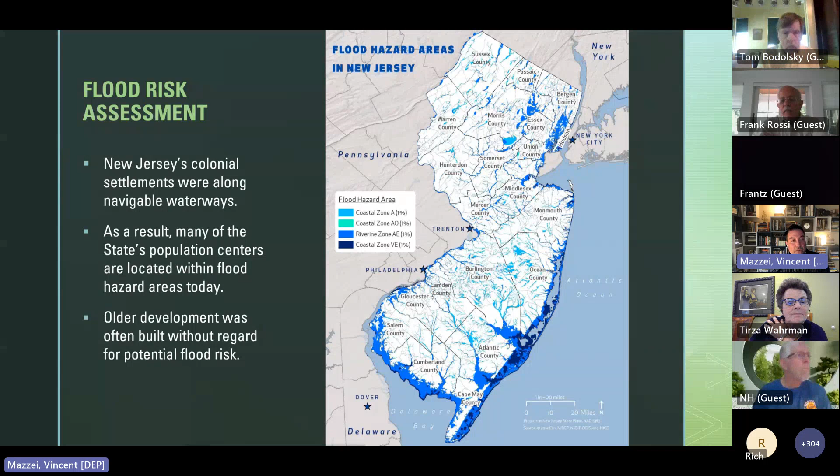And it's all about that assessment of flood risk. If you were buying a piece of property, looking for a place to live, or thinking of renting a building for a business, you might pick up a FEMA flood map and assume that it's a good approximation or indicator of your flood risk on the site.

The problem is that the flood risk shown on those maps is measured by what's happened in the past. It's a projection of the future based on the past. And if there's one thing we know about climate change, it's that the progression of these things is no longer linear. Stationarity is dead.

So we can't use flood maps based on data collected 50 years ago or more, shown on FEMA flood insurance rate maps, which were produced by FEMA to let insurers know, and themselves know, how much insurance to charge someone.

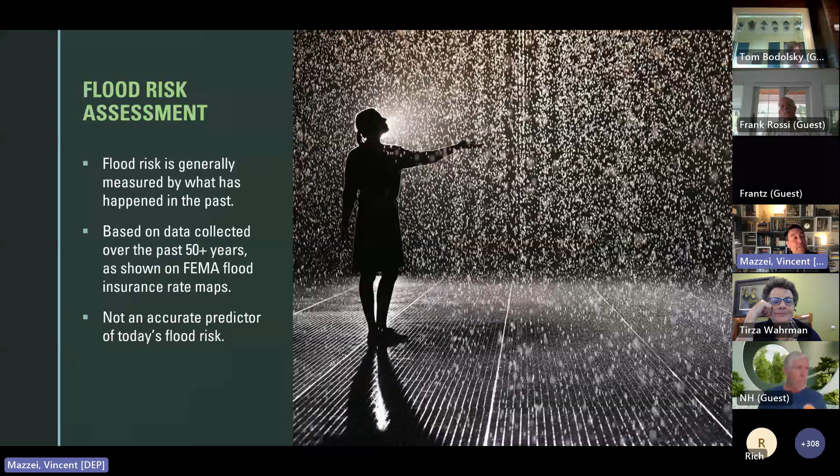So it's basically a flood insurance tool. And we realize that not only does it not accurately show what your flood risk is today, but it's definitely not a predictor of tomorrow's flood risk, because it doesn't include any climate change data in it.

So here we are, faced with these flood maps that we use, and they're useful, but how do we adapt them to a changing climate?

The basis of this, of course, is that people need to be aware of the flood risks when they're buying, renting, or developing property.

And although mapping is a good place to start, we've seen over and over again that flooding goes past that line on the map, because the flood doesn't know it's supposed to stop at that line on the map.

I'm going to show you some aerials, some examples where just recently the flooding has gone significantly past the line on the map, and the people outside that line are often not protected.

They don't know that they should get flood insurance. They don't know that they're at a flood risk.

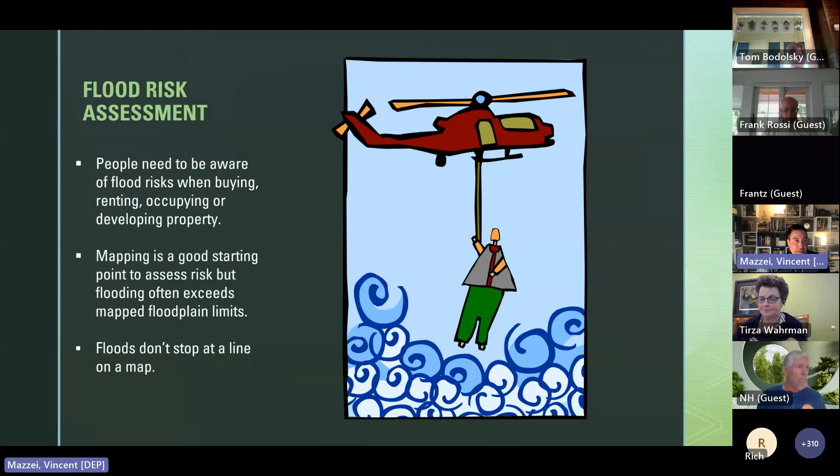So here's a snapshot of New Jersey, just to set the table. 9.2 million people, the most densely populated state in the nation. About 16% of the state lies within a flood hazard area.

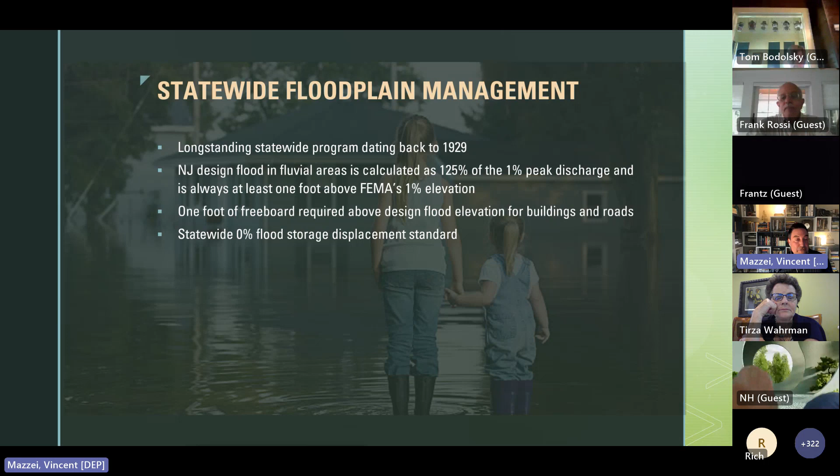We have 0% net fill across the whole state. I was at a conference recently in Raleigh, the Association of State Floodplain Managers, and we gave a presentation about what New Jersey was doing, and no other state is doing anything like this. When I was explaining the concept of flood storage displacement, that when you put some building or fill in a floodplain, the water that would be going there has to go someplace else, so we have to balance that. Folks in other states were astonished that we've done that. We've done that for years.

We have to have dry access for critical buildings and multi-residence buildings. So if you're putting in a new hospital or an apartment building, you have to have roads that can get to and from the building so that emergency vehicles can get there and people can evacuate. We've got progressive statewide stormwater management policies on the forefront of the state, and stream corridor protection standards through our riparian zones.

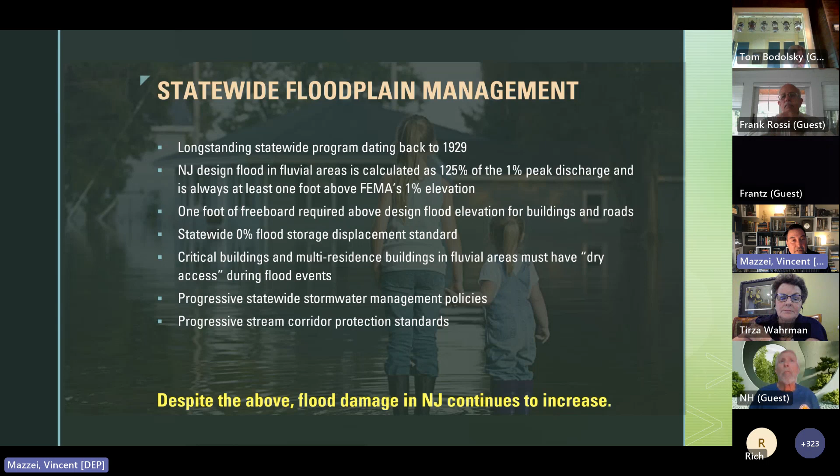But despite everything that we've done so far, flood damage continues to increase every year. And so we felt that it was incumbent on us to take action.

So if you put it all together, you've got the most densely populated state. You've got chronic flooding issues going back hundreds of years. About 16% of the state lies in a flood hazard area, and more than 16% of the population is in that flood hazard area. We have enormous development pressure. Development itself can increase flooding if it's not regulated. And then you add on top of that climate change. So that's unsustainable unless we take action.

And that's what this rulemaking is about. So going back to 2020, Governor Murphy had signed Executive Order 100 and Administrative Order 2020-01 by then Commissioner McCabe, directing DEP to integrate climate change considerations such as sea level rise, chronic flooding, precipitation into its regulatory and permitting programs. So this is a piece of that.

It's an effort to take the data and the science that we have, and what we know has happened and will continue to happen, and put it into our stormwater rules and our flood hazard rules so that people are safer, and ultimately that things designed today are not just safe for today, but safe for the lifetime of the structure. That's the goal.

So just a little background: higher temperatures in the atmosphere have been occurring, and that increases the energy in the atmosphere, which increases the potential for more intense storm events. Some studies show that by the end of the 21st century, heavy storm events are projected to occur 2 to 5 times more often and with more intensity than in the previous century. I don't have to remind everyone of the major floods that have hit just in this century so far. And that doesn't include the flash floods that seem to be happening every time we turn around. It seems like there's another report of a flash flood happening somewhere.

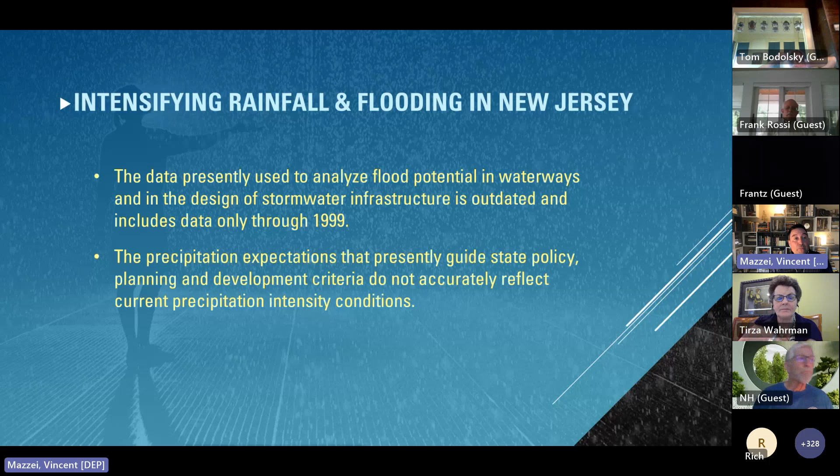And that's not surprising, right? Because intensifying rainfall means intensifying flooding. Storm sewer systems can only handle so much water. And the data that things are designed on, even today, is based on data from the National Weather Service that was only updated through 1999. So when someone is designing something even for today's conditions, it's not even today's conditions, right? It was based on the 1999 data. And of course, we know that the precipitation expectations that presently guide our policy don't accurately reflect current precipitation intensity conditions. So this is our situation before we adopted this rule.

And here's some of the data we can show. We partnered with NOAA and the Northeast Regional Climate Center. There were two pieces to this study: one was, well, what's happened since 1999? Because that's a long time ago at this point—have things changed since then? And the second piece was, how are things anticipated to increase or change going into the future?

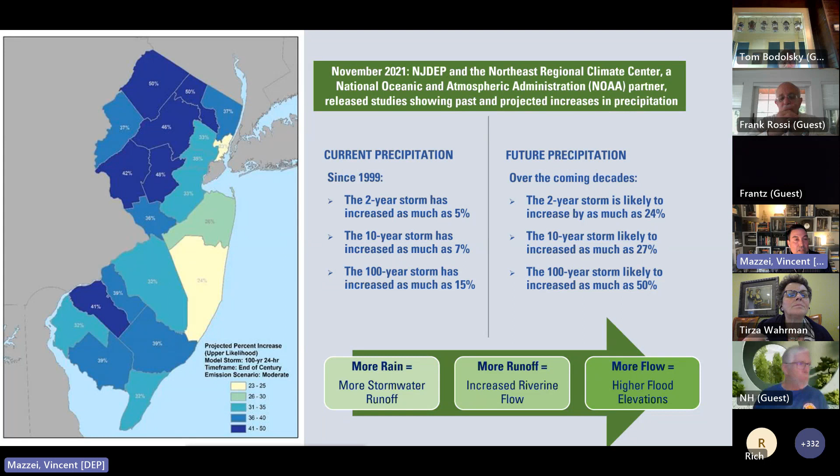That's just in a 23-year period. And then projecting into the future, if you look at that map of New Jersey that shows the different counties, it shows the probable projected increase in the amount of extreme precipitation that would occur during, say, the 100-year flood. For example, the 100-year storm, which today is 8.5 inches of rain, give or take, is likely to be as much as 50% more in some counties by the end of the century. So if you're designing things with today's or 1999's data in mind, it's not going to be protective of those future conditions.

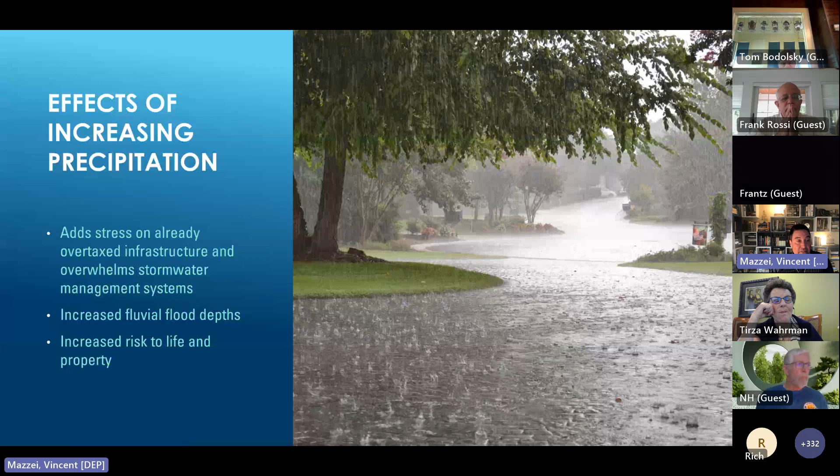So the effects of increasing precipitation are obvious. It adds stress on already overtaxed infrastructure, overwhelms stormwater management systems, and increases fluvial flood depths. It doesn't change the sea level, but it increases our riverine systems. And obviously there's an increased risk to life and property.

So when we first went down this path to incorporate this new data, it was triggered, let's say, by what we saw during Ida. And it's not because of Ida, but Ida was kind of a wake-up call as to what we unfortunately are going to be experiencing more and more as the future progresses.

So almost 2 years ago now, we had the remnants of Tropical Storm Ida pass through. Newark, for example, experienced the highest 1-hour rainfall ever recorded there. The National Weather Service documented over 10 inches of rain in certain parts of the state in the center. I happen to live in the kind of ground zero of it, and I looked at the nearby gauge, and it was literally off the charts for the rainfall. It was like a 10,000-year flood event. But the problem is that it doesn't happen once every 10,000 years, and that's the problem we're trying to address.

So as an example, looking at the data we had after Ida, we said, let's compare what the flood elevations were in Ida along major rivers as compared to our design flood elevation today.

Now, this little picture here is a little blurry, but if you can recognize where this is, I live in Hunterdon County. This is taken from the ShopRite parking lot on Route 202. And when I saw this photo, and you can see there's about 3 feet of water here in the parking lot and in the roadway, I thought, well, I know the area pretty well. I don't think there's any stream or river near here. So I looked at the maps, and there's nothing anywhere near here.

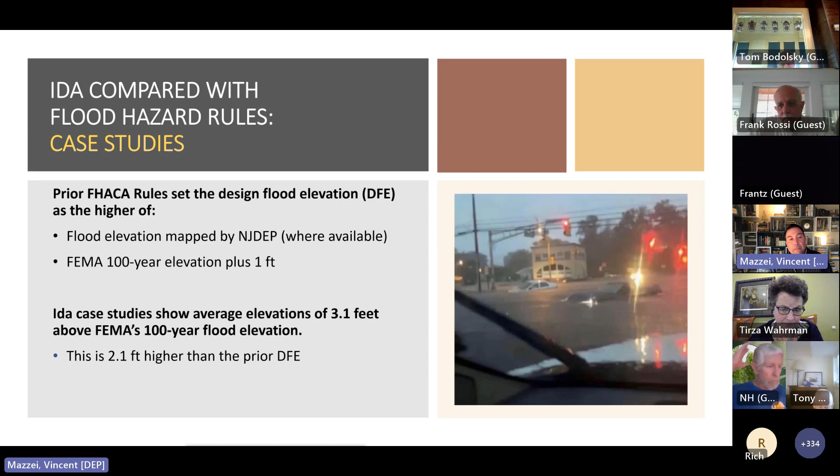So this is all runoff coming from Flemington, the center of town, development that has gone back 50 years or so that has little or no stormwater management, and even some newer development that has stormwater management. But the stormwater system on 202 could not possibly handle all this water. And so Route 202 became a river. There were numerous fatalities on Route 202, people being stranded in their cars, because it happened very quickly. There were actually 30 fatalities as a result of just that one storm.

So here's kind of a snapshot of what's been happening that I think illustrates very well where we are. If you look at the Raritan River at Bound Brook, there are USGS gauges along all of our rivers and streams, and here's one. We looked at the data that was here. You can see that Ida actually matched Hurricane Floyd. Now, Hurricane Floyd was a huge, widespread impact where Ida was not, and it matched that.

And what's the takeaway here, which I think is astonishing, is that at this location, we've actually exceeded this 500-year flood 3 times since 1999. So if you're having a flood 3 times in a 23-year period, that should only be happening on average once every 500 years—it has a 0.2% chance of happening every year. Then there's something wrong with the statistical basis we're using to create these maps and come up with the probabilities.

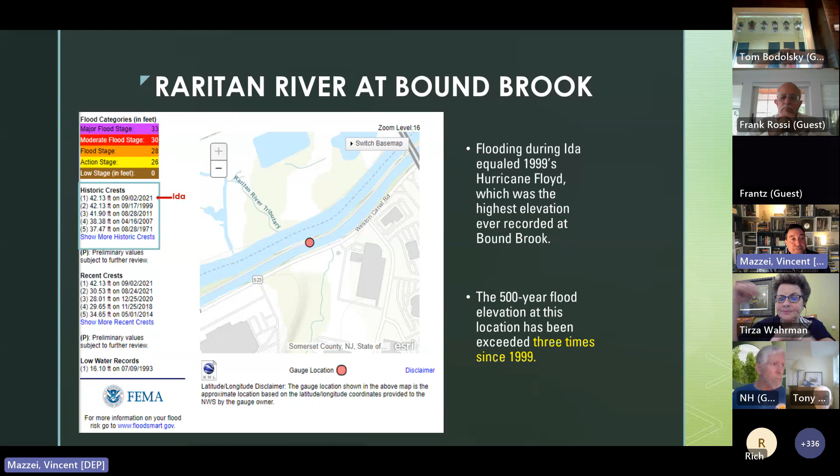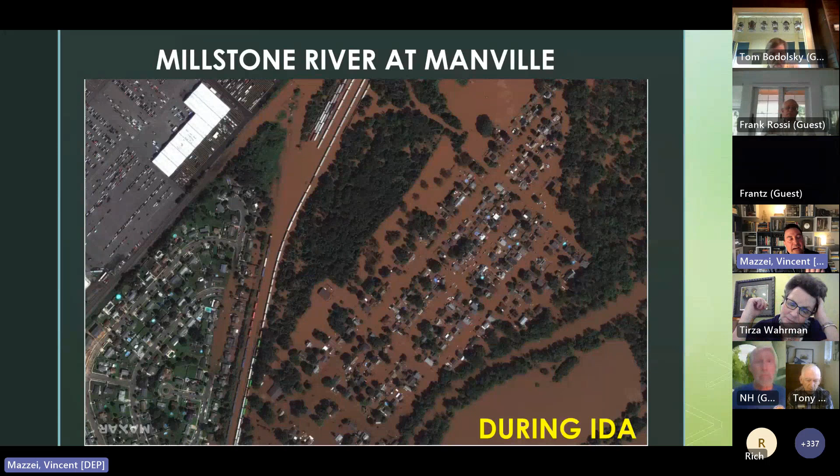So there were a lot of people during Ida who were impacted outside that line, because again, the flood doesn't know it's supposed to stop there. So those are the people we're trying to protect: the people outside the line, and the people inside the line, so they understand what the actual flood risk is to them.

Now this is kind of anecdotal, but this is the road I live on, and I want to show you what happened. Here's the before and the after, same location. I took the first picture off Google Maps because I didn't have one of the road, but I took the second one myself, and you can see the tree on the right side is the same location. The Wickecheokee Creek, which was about 100 feet to the left of the road, decided it wanted to be where the road was, and the damage matched up very well with where the floodway was shown.

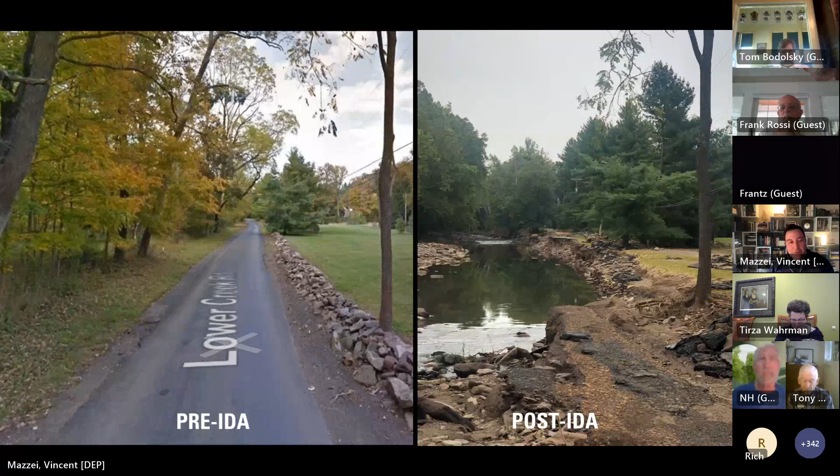Now, it should have been an indicator that the name of the road is Lower Creek Road. I was at a seminar in New York a few weeks ago, and someone said, if somebody doesn't know the flood conditions of an area, what can they do if they're buying a piece of property? And I said, well, look at the name of the road. If you live on a road called Lower Creek Road, or Bayside Drive, or Valley View Terrace, you might have some flooding problems. If you go to Hilltop Crescent Court or something, you're probably safer. Anecdotal, but these are real impacts, and people were hurt.

So let's move on to what we've done.

As you know, back in December we proposed an inland flood protection rule, which proposed amendments to the stormwater management rules and the flood hazard rules. Those amendments were adopted, with some minor changes, on July 17th, just last Monday.

Some key points in the stormwater rules: when you're designing a stormwater management system, you have to design it not just for today's precipitation, but also for the anticipated future precipitation that may occur on a site. The idea being that what you're designing should be safe for today and safe for the future. For the engineers out there, it prevents the use of the modified rational method for stormwater calculations—not for pipe size or pipe capacity, but for figuring runoff from an area, you can't use those methods anymore because they're not as accurate as other methods.

And the key point in the flood hazard rule is that when you're choosing to use mapping, you take the maps we have and add 2 feet to find your design flood elevation, compared to our previous standard.

Our previous standard was you use what's shown on a state flood map, if there is one, or you use the FEMA map plus a foot, whichever's higher. Now it's the state map plus 2, or the FEMA map plus 3, whichever's higher. And that becomes your design flood elevation. Now, we always give people a choice.

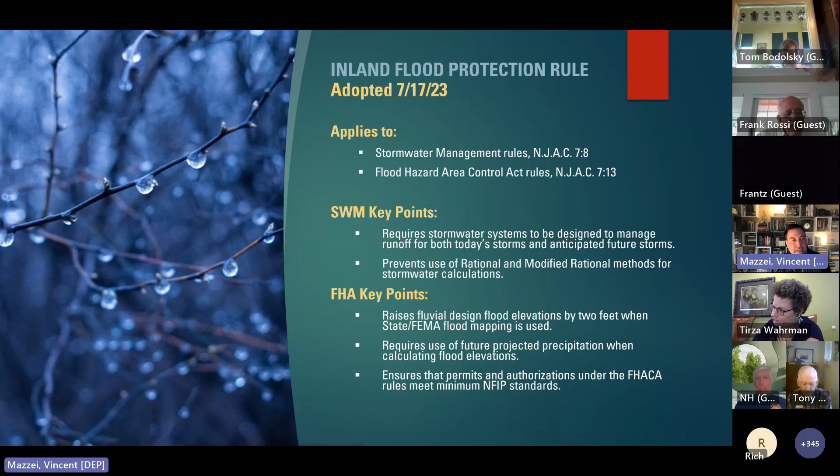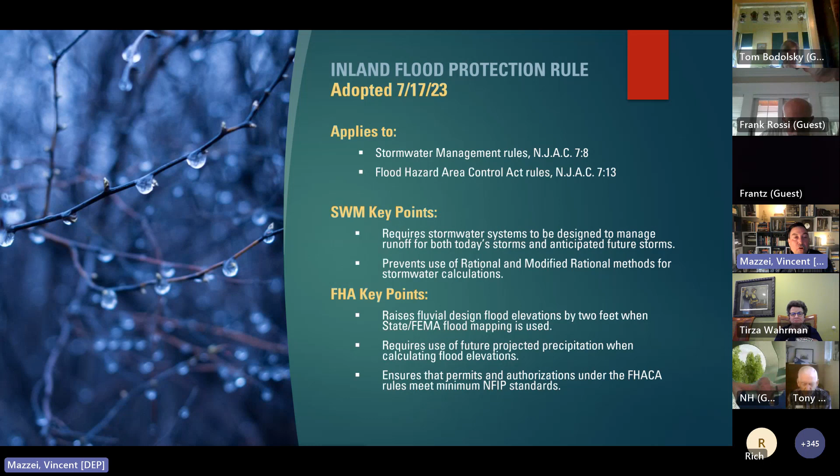That makes sure that we're not designing for today's flood hazard area, but for the future flood hazard area. Another important piece, and we've been working with our partners at FEMA who have been extremely helpful through this process, is we want to ensure that anytime we issue a flood hazard permit and a coastal zone management permit, because that ties into flood hazard, that we meet or exceed federal standards. That's extremely important because New Jersey is a community that participates in the National Flood Insurance Program. It's incumbent on us to make sure that what we're allowing for state projects and for everyone else meets those standards. So this rule takes a great step forward in closing any kind of potential gaps in our program to make sure that we meet those federal minimums.

So here's a diagram that shows a river and 3 houses, and this illustrates what we're talking about. Here's the current, previous flood hazard area. This was prior to last Monday. This is where our regulatory flood was. Adding 2 feet to it, it not only makes it 2 feet deeper, but it also makes it wider, because land that was outside that line is now encompassed by this flood. So you might be thinking, I'm going to buy that blue house and I'm outside the line and I don't have any flood issues. But the truth is that in the future, at some point, you're likely to have flooding issues. And we want people to know that, and we want that blue house to be designed with that in mind.

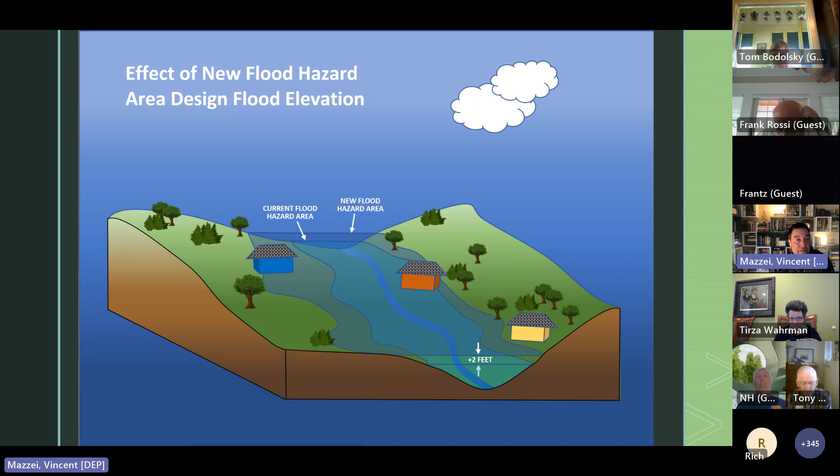Now, we looked at stormwater management and did a few examples of what the practical impact would be of using the data that's adjusted from 1999 to today's conditions, and also using those projected future precipitation conditions. We wanted to see what that might do on different scenarios. So we took a 2.5 acre site in Sussex County, and we looked at different soil types, and we said, let's just assume that it's all forested today, and people bought it and they completely paved the whole thing and put a warehouse on it.

On the top there, you can see there's a little chart, and there are a lot of variables that go into stormwater management design. So this is just a snapshot and an example based on our scenario that we chose. You can see on the top left, there's 4 different soil types that we use: A, B, C, and D - A being the most pervious, D being the least pervious. The first thing we did was we said, assuming some basic things on the site, what percentage of the site would need to be occupied by stormwater management systems above ground to capture and control the runoff based on the previous rules? You can see, depending on the soil type, it ranges from about 11.2 to about 8.6 percent of the site. And again, there's a lot of variables, and you can do some things underground and whatnot.

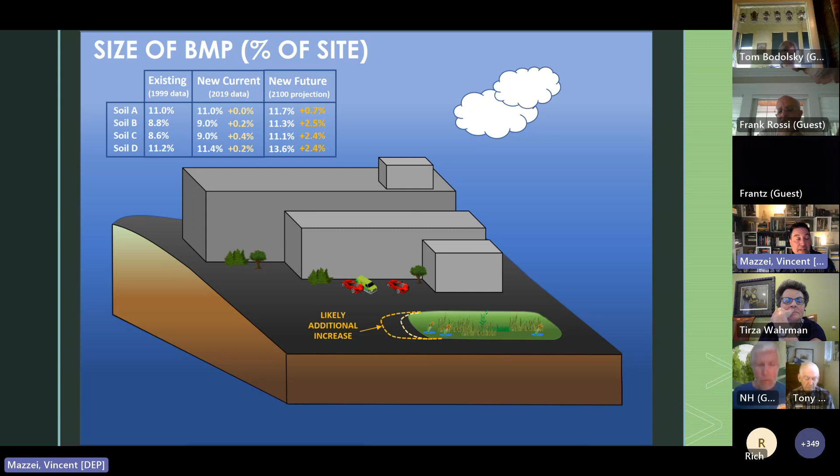And of course, it depends on so many things, like the depth of your water table, or whether you can manage stormwater underground, or whether you're splitting it up into different pieces or whatnot. But this, we thought, was a good illustration of what we should expect.

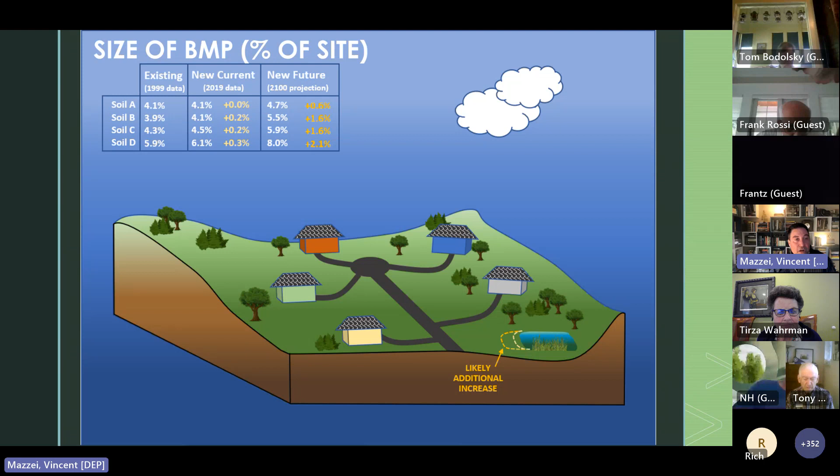And then we took the same site and said, all right, well, let's say there's less intense development, and instead of putting in a warehouse, putting in a subdivision, right? So let's say a 5-home subdivision, half-acre zoning. The increase is marginal, even for the new future projected precipitation to the end of the century.

So that's kind of how we got where we are and sort of what the impacts are. But now I'm going to walk through what specifically the changes are. And I'm not going to spend a lot of time reading each one of these things, but if there's interest in them, we can go back to them.

And I said, as I mentioned, since this is being recorded, and also since we can share this presentation with folks, you can go back and you can see. So the next few slides, next about 20 slides, show every single change that we made in the rule, explains them, and then there'll be a time for Q&A.

So we added in the stormwater management rules. So the first part of this is the stormwater management rules, and then I'll go over what we did to the flood hazard rules. So the first part is that we added a definition for public roadway or railroad, and a definition for public transportation entity.

And the reason why is that there are certain considerations in the rule for public transportation entities, which is any federal, state, county, or municipal government or independent state authority that is working on a public roadway or railroad. And there's different standards for that, because we recognize that there's unique challenges that the public transportation entities face when they're updating their systems, or reconstructing roads, or making improvements to roads.

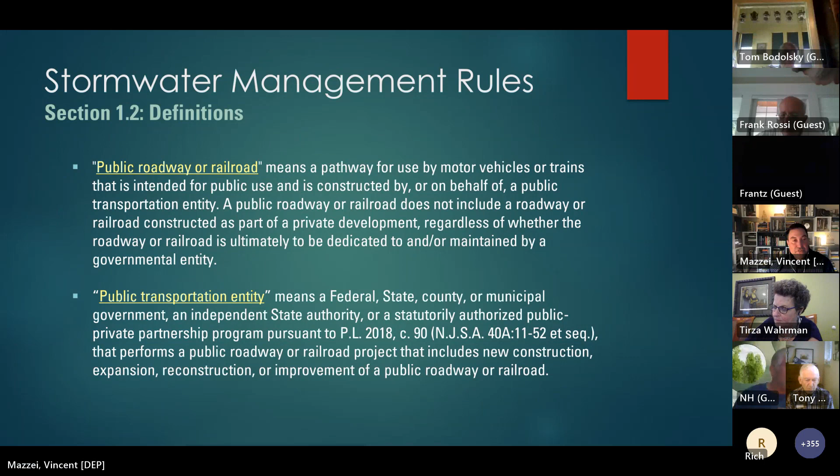So those definitions explain who this is for.

Then in section 1.6, that talks about the applicability to major development. So this is the section of the rule that says this is who needs to come to us, and this is why. And in that section, we amended it to clarify that if a project needs any of the following permits or authorizations,

and a technically complete application was submitted to DEP before last Monday, then the whole project is not subject to the new standards, because we have to apply the standards of the rules that are in place when a complete application is received.

And of course, the application that's submitted has to have a stormwater management component. And that's important because you could have applied for a freshwater wetlands permit for something that's otherwise a major development, but it doesn't trigger stormwater management in the freshwater wetlands rules, because the way the trigger works in freshwater wetlands is different than flood hazard area and the CZM rules.

Now, that's something that we're going to address in the next step of our regulatory reform. So later this year, you're going to see a rulemaking that's going to take the freshwater wetlands rules and make them the same as flood hazard area and CZM. But for now, there's a disconnect there. There's a difference in the way that we deal with things.

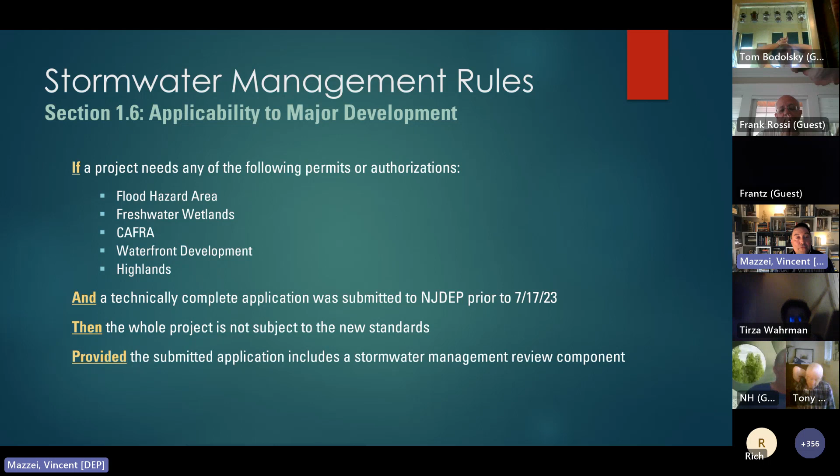So if you have a project that has a stormwater management review component and you applied for it before last Monday, then you would be legacied from the rule. And I use that term legacy because the term grandfather has a very sad past to it. So we're not using the word grandfather to describe applications that are not subject to the rules. We talk about legacy. So we're talking about the legacy provisions of the rules.

An important thing to note is applications made to the state that will not legacy a project are applicability determinations, which are a snapshot in time of whether or not you need a permit based on the conditions that were present when the determination was made.

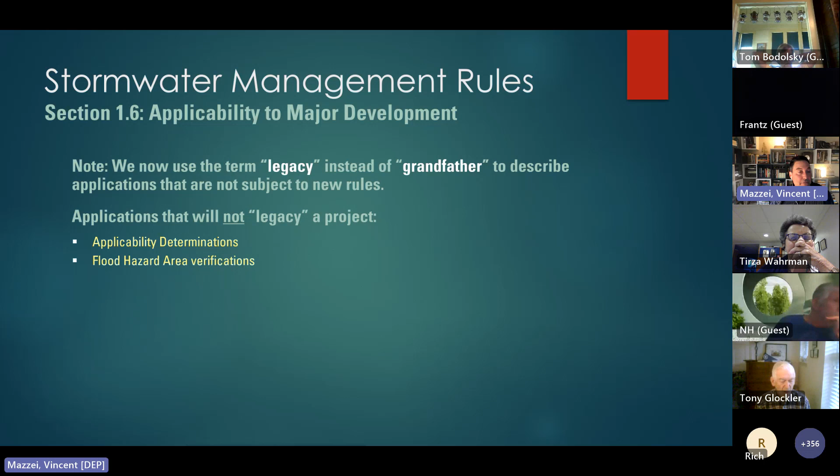Flood hazard verifications, which is a process that we go through. It's like a wetlands LOI, and people submit data to us and we verify, yep, this is where the floodplain is today. But the floodplain limits have now changed since this adoption on Monday. And so those verifications are not void, but they can't be relied upon to understand the extent of flooding on a site. And I'm going to give a few examples and explain what that means.

Freshwater wetlands letters of interpretation don't interact with these rules, so that doesn't help. Applications made to the state that don't include a stormwater management review component, like a wetlands GP10 that's building a road to an enormous development that by itself is a major development, would be looked at as a major development by the municipality reviewing it. But the wetlands rules don't trigger the stormwater review component unless it's a major development in the wetlands and transition area, and that doesn't happen that often. So there's a different approach there that we're going to address.

Applications that are not technically complete prior to last Monday don't get legacied from these new standards. So if you submitted an application prior to July 17th and it's been found to be technically complete within the pre-review period—let's say it came in on Friday, July 14th, and staff is still looking at it today, and tomorrow they decide yes, this came in as a complete application—that project and permit application is legacied from these new provisions. But if you submitted it prior to July 17th and we subsequently found it was not technically complete when submitted, then it's not legacied, even if the problem is fixed later. So you had to have gotten in the door before last Monday, and it had to be a technically complete application.

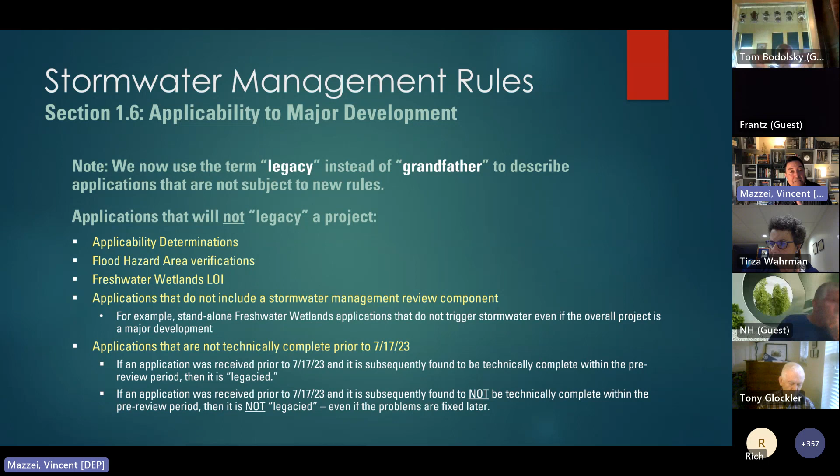Now, projects that don't require approvals from our group can be legacied if certain local approvals under the municipal land use law are obtained prior to the date of rulemaking. I'll go through some of that in a few slides, but basically that's saying you can have situations where you don't need a state permit. Of all the major developments that happen each year in the state, we estimate about a quarter of them need a flood hazard permit, a wetlands permit, or a coastal zone management permit. So the state is only looking at a quarter or so of the major developments in the state, whereas municipalities are looking at all of them.

So let's say you applied to your local community for certain approvals, which I'll show you, that will legacy you from the provisions as long as it was a complete application prior to July 17th. Now, municipalities have a year—this says emergency rulemaking, I should change that—but we have a year from when we adopted to amend their municipal stormwater ordinance. But anybody coming to the state has to meet those standards immediately. And anyone covered under residential site improvement standards would have to meet it, because those standards will be pointing to our stormwater rules.

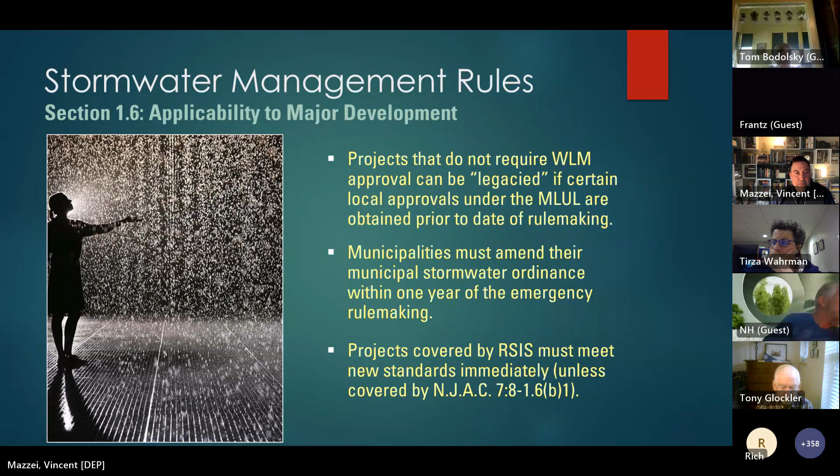So there are additional legacy provisions for certain public roadway and railroad projects. This doesn't just mean DOT—it can mean county roads, municipal roads, things done by the Turnpike Authority, New Jersey Transit, or the Port Authority. There's a provision in the rule that focuses on what DOT calls the preferred alternative, and other entities might not use that term, but there's an equivalent milestone they'll point to.

What that means is that when improvements to a public roadway or railroad are being contemplated, there's a process that has to be followed of public engagement and scoping out the purpose of the project, understanding what properties will be impacted, and putting down what the goal is. A lot of work leads up to that point, and once that preferred alternative or equivalent milestone is reached, it's very difficult to go back and change the project significantly because a lot of decisions have already been made.

So the rule has a provision that says notwithstanding all the other things we just talked about, if you're a public transportation entity proposing work along a public roadway or railroad, and you've reached that preferred alternative or an equivalent milestone, then you're going to be subject to the rules that were in effect prior to this rulemaking. As I mentioned, the logic is that these projects have already undergone a significant level of planning, and revising them at that point would be highly impracticable.

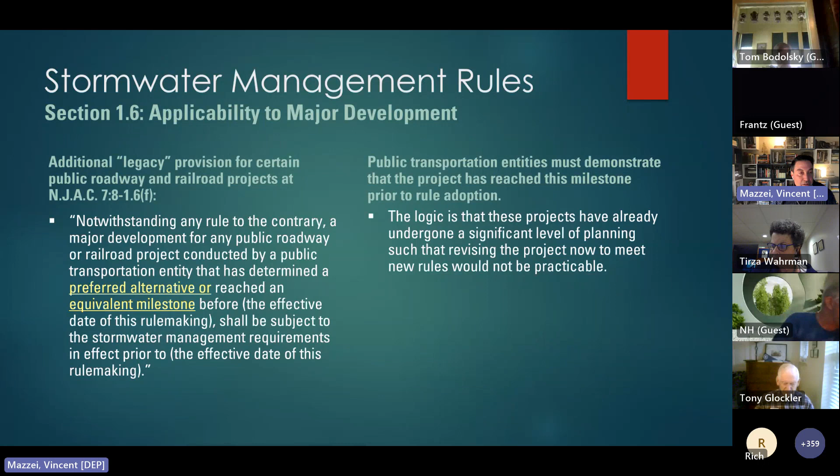That being said, we always have conversations with our applicants to find ways that things can be improved. There could be places where a system can be improved and made safer without having to go back to that milestone.

So what that means is that there's now two tiers of potential legacying. You could have projects that were technically complete prior to the GI rule, or reached that milestone prior to the Green Infrastructure Rule that we adopted on March 2nd, that became effective March 2nd, 2021. So you could be subject to everything else in the rule except for that if you applied prior to March 2nd.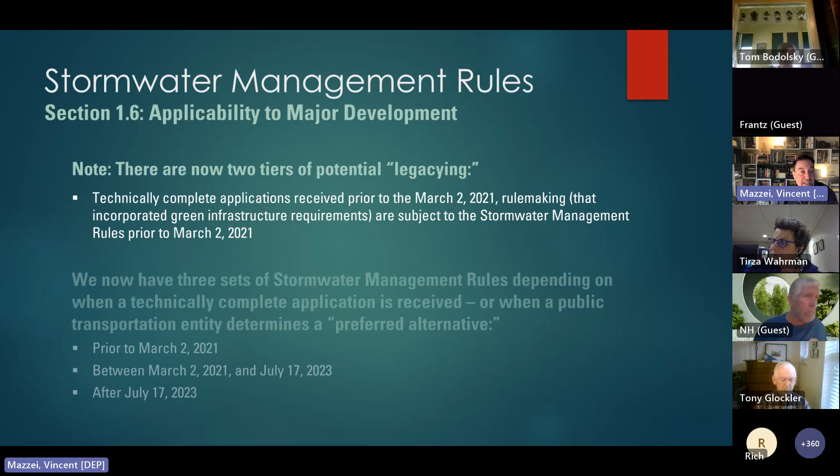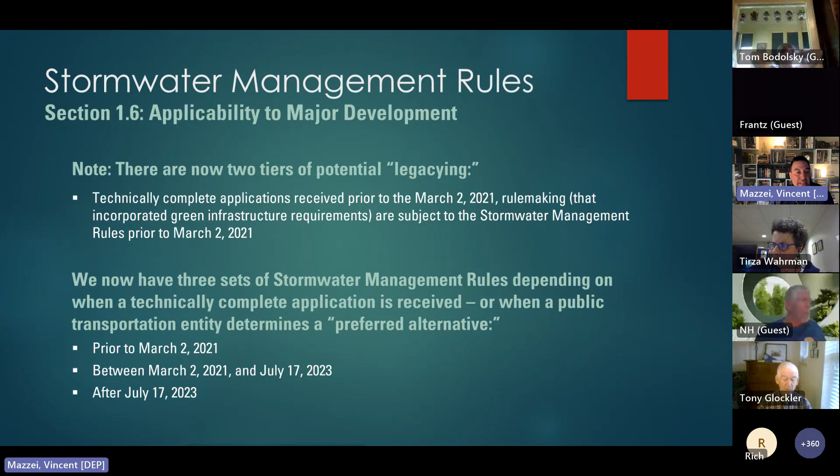And that's where we had before, but now we've got actually three. We've got the rules that were in place up to March 2nd. We've got the rules that were in place between March 2nd, 2021 and July 17th, 2023, and the ones that are after that. So internally, we'll be tracking projects to determine which ones need to meet which rule and why, and then we can assess how that's working.

Now, the heart of this is that in the stormwater management rules in subchapter 5, there are two tables. There's one table that adjusts precipitation to today, or really 2019. So this adjusts the 1999 data to the 2019 data that was presented in that study. So you can see, given what county you're in, your 2, 10, and 100-year design storms are affected by this percentage.

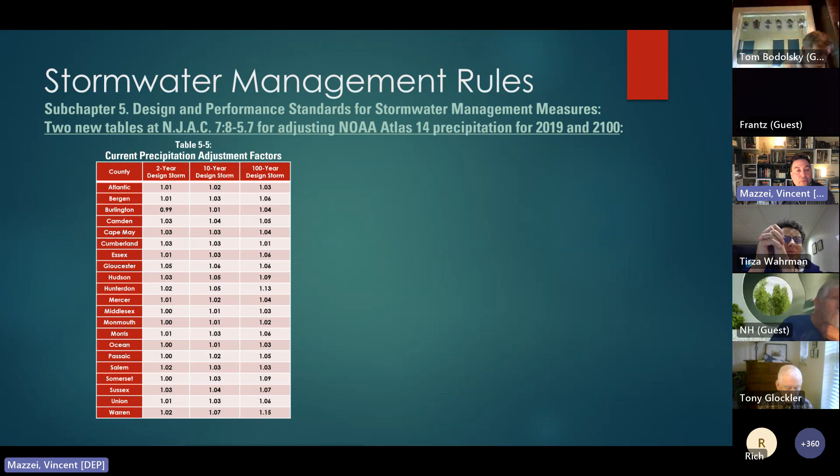So what you would do is, let's say you were in Warren County and you were designing for the 100-year storm at the bottom right corner. You would apply a 1.15 multiplier to the rainfall shown by the National Weather Service for Warren County for the 100-year storm based on 1999. So if that says 8.5 inches, then you would take 8.5, multiply it by 1.15, and that would be your design storm that you have to deal with.

Why do we choose the year 2100? Well, roads and buildings and businesses and things that are being constructed today have a 50, 75, 100-year lifespan, depending on what it is. And so 2100 sounds like it's very far off, but it really is not. Our kids and grandkids are going to be around to see that. Maybe some of us will be around there to see that. But it's closer than we think, and the changes are so dramatic that it's essential that structures designed today are able to withstand flooding for those future conditions.

Yeah, let's take a break for a second. I see Glenn Kientz has raised his hand. You may need to unmute yourself because I think everyone was probably muted.

All right, well, while Glenn is figuring that out, let's go to Dave B. in Maplewood Township. So I do want to highlight that there is a chat box in here, and there's been several people asking questions and whatnot.

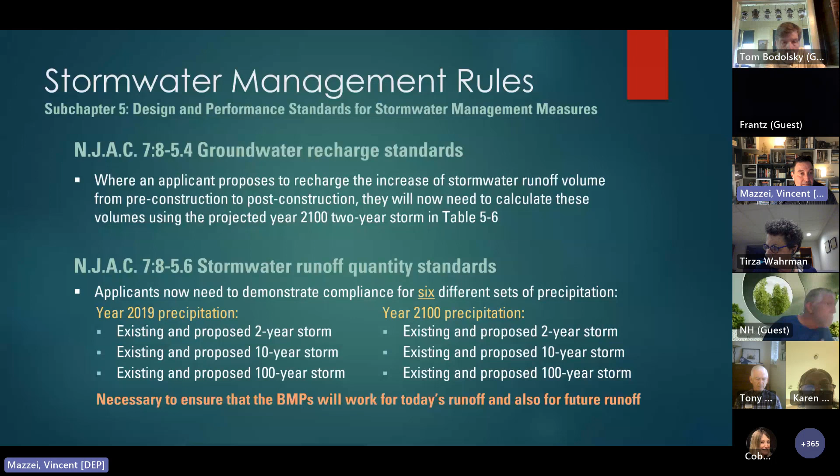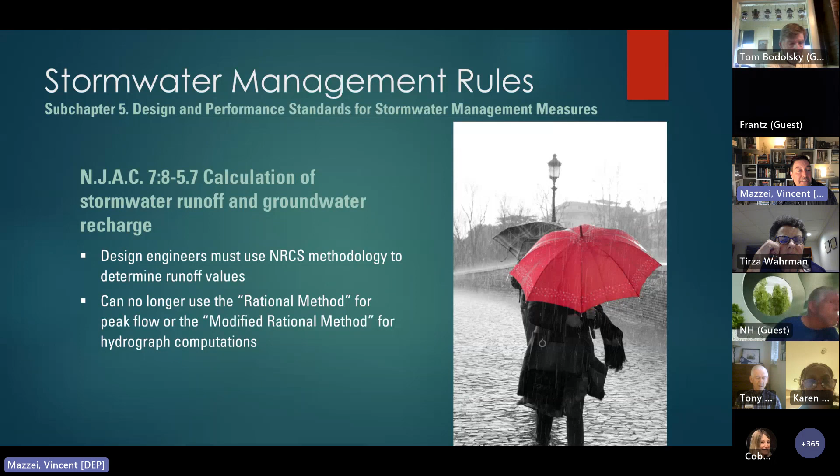This is necessary to ensure that BMPs put in today will continue to work. For the calculation of stormwater runoff and groundwater recharge, you must use the NRCS methodology to determine those runoff values. As I mentioned before, you can't use the rational or modified rational method for hydrograph computations, but that doesn't affect your storm sewer designs.

And those are the changes that we've made to the stormwater rules, which are significant, but kind of targeted and limited to those things. And let me go through the changes to the flood hazard rules. Actually, let me take that back. Why don't we take a minute or two for questions we might have right now on stormwater before we shift over to flood hazard, and at the end we can answer any remaining questions.

If there's questions in the chat, maybe Jesse could read them to me, or if someone has their hand raised. I think Tom. Sure. Okay, just going to start at the top.

Confirming the plus 3 feet is not applicable to coastal flood elevations. That's correct, this rulemaking only addresses riverine systems and fluvial flooding. So the next rulemaking will address flooding along the ocean as a result of sea level rise. Also confirming it is FEMA 100 plus 3 feet, not FEMA 500. Correct, it is FEMA 100 plus 3 feet, not 500.

Can you provide more detail on computing or locating projected rainfall data? In other words, the basis and background for how we got there. Probably not something we can cover in depth here, but as I mentioned earlier, we partnered with folks from Cornell and Rutgers, and New Jersey specific studies were done that focused on the amount of rainfall likely to occur. There's always a probability involved, a median value of what the precipitation could be, and different statistical scenarios. We always take the high end of the likely range, which in statistical analysis is between the 17% and 83% probabilities. So we picked the numbers where there would only be a 17% probability of being exceeded. Sussex County has a multiplier of 50%, meaning there's only a 17% chance that number will be exceeded by the end of the century. That means there's a chance it could be exceeded, and it could be more than 50%.

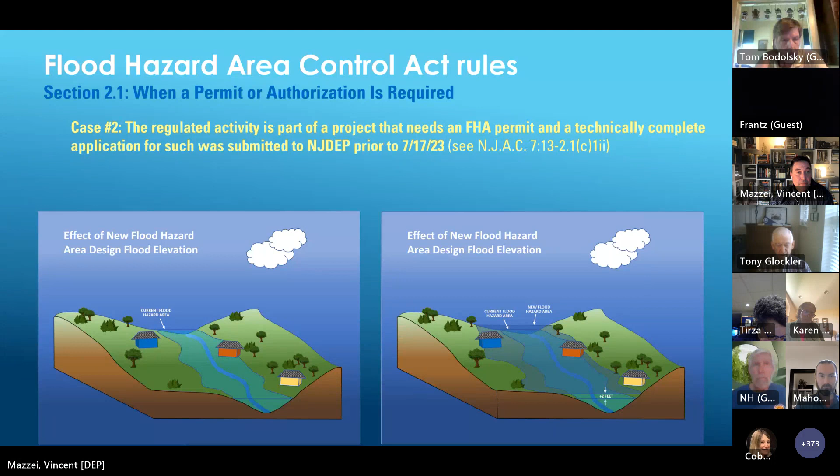Now, case number 3 is, let's say that you didn't need a flood hazard permit for any part of the project. Let's say you were building 3 houses and none of them were in today's floodplain prior to July 17th, and now they are, because the floodplain has gotten larger. If you didn't need a permit before July 17th and you've received one of these 5 municipal approvals prior to July 17th, then you would be legacied from these standards. If you don't have one of these 5, then you would not be legacied, and your project would now need a permit. This is important to note for things like permits by rule.

There's 2 kinds of permits. There's permits that are promulgated as part of the rule - GPs, GP by certifications, and permits by rule. And then there's individual permits, which is the detailed review back and forth that we do for most of the projects in flood hazard area. You could have an activity that's authorized under a permit by rule to do XYZ, and you don't get a permit application from us. You don't have to supply anything to us. It's an automatic approval that if you do things in this manner, you don't need to come into DEP for additional approvals.

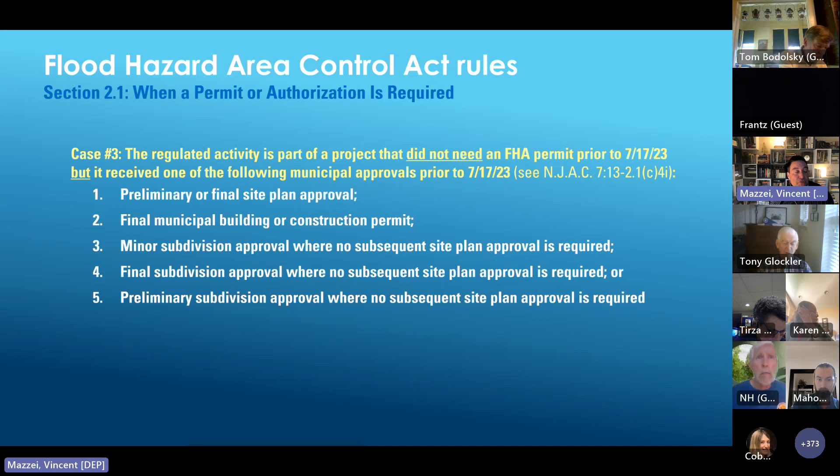Well, the floodplain limits have now changed. The flood hazard area is wider and higher than it was before. So you could be in a situation where you were covered under a permit by rule and now are no longer covered by a permit by rule. Those are things that we need to talk through on a case-by-case basis with folks, because they need to understand what the implications are.

And the 4th case is that, let's say that you didn't need a flood hazard permit, and you didn't need any of those municipal approvals, but your construction has commenced prior to July 17th. So let's say that you're DOT and you don't need approval under the municipal land use law. If you have begun construction prior to last Monday's rule adoption, and you didn't need a permit from us before that, then you're also legacied from it.

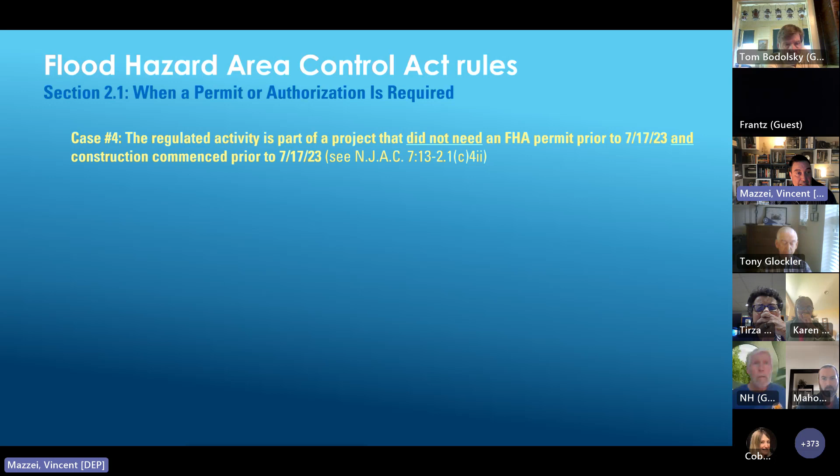So here's the old flood hazard elevation, and here's the new flood hazard elevation. This shows a house. Next time I'll draw it with a road, because that would be more accurate here. But let's say that someone was building in that zone and they didn't need a municipal approval because of who they were or what they were doing, and they didn't need a permit before, then they would be legacied as long as they start to construct.

But starting construction, there's a lot of words there. I won't read it all, but really what it means is placing permanent structures on a site. It doesn't mean clearing, grading, filling, digging holes, or grading the site to prepare for development. It means putting in like the foundation of a building or the base for a roadway and so on. This definition is in the rule, and you can see it - there's citations at the top there to show you where to find it.

So determining the flood hazard area limits and floodway limits, there are 6 methods in the current rules and prior rules. I'm going to show you how each one of those 6 methods have been affected.

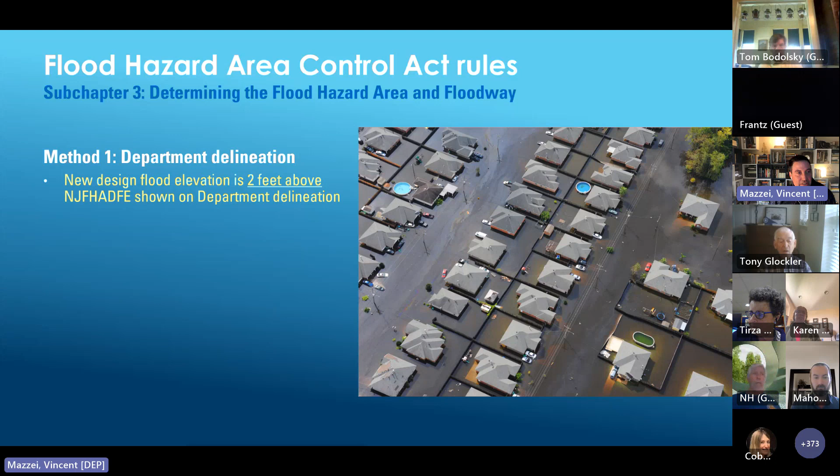Method 1 is if you're relying on a DEP map. Your new design flood is 2 feet higher than the design flood shown on the department delineation, which is a little confusing, because what we're saying is that the design flood is 2 feet above the design flood. I tried to word it as clearly as I could in the rule, but basically it means you pull out the state map, find your design flood that's depicted there on the profile, and add 2 feet to it. That's your design flood under method 1.

Method 2 is the FEMA tidal method. That's unchanged because this rulemaking only addresses riverine or precipitation-driven flooding. This method will be addressed in the upcoming NJPACT proposal that we've talked about many times.

Method 3 is the FEMA fluvial method. The new design flood elevation is now 3 feet above FEMA's 1% flood elevation. So you look at the flood profile and add 3 feet to it. In section 3.2 of the rules, it tells you that you have to use the higher of method 1 or method 3. So you'd look at the design flood under method 1, which is DEP plus 2, and under method 3, which is FEMA plus 3, and whichever one is higher is the one you would use as your design flood.

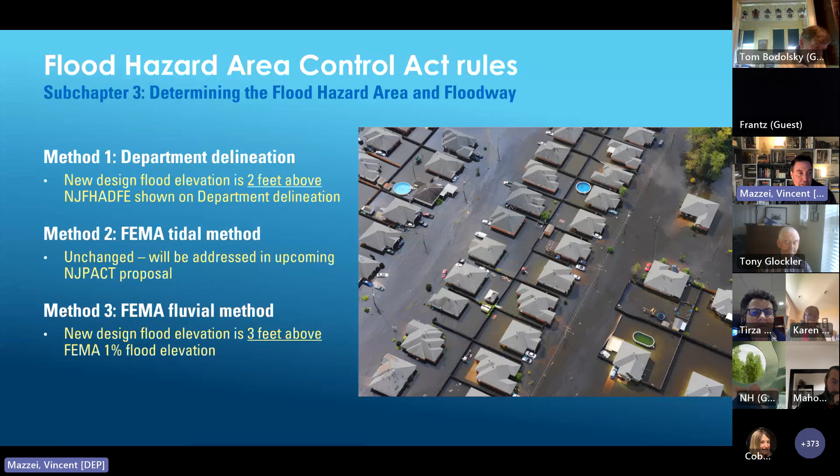Method 4 is limited to situations where you're doing work in a channel, like a bridge or a culvert, or some kind of flood control project in the channel that changes the flow rates. Rather than make people go back and recalculate the flow for those channels, you can use 125% of FEMA's 1% peak flow rate. So under method 4, you take FEMA's 100-year peak flow rate, which you can get from the flood insurance studies, add 25% to it, calculate where that flood elevation will be, and then add 2 feet to it. That's your new design flood elevation. So when designing bridges and culverts, you kind of have to back into the answer, because adding 2 feet will add to the flow rate sometimes significantly, and you have to figure out what that is at each given location.

Kudos to anybody that knows where this is. I've used this photo before. Couple guesses as to where this picture was taken. Not by me. Gabe knows because it's close to where he went to school. Is it Lambertville? No, same river, wrong bridge, but it looks close. Got it right in the chat though. Anthony Lopez put it in the chat. Phillipsburg. That's the Free Bridge in Phillipsburg during the 1955 flood event. The story I heard from someone who saw it was that a barn was floating down the river, with chickens on top, and all the kids were watching it flow down until it smashed into the bridge and took out the center span between the piers. They said there were chickens running around Phillipsburg and Easton for days after that. So some useless information for you.

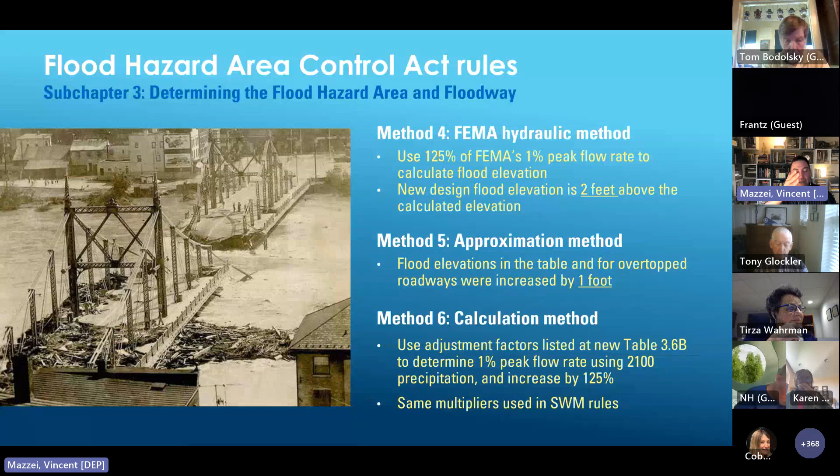Method 6 is what you would use if you don't have a map, or if you don't like the map, because you're going to have that option. It uses the map plus the factors of safety described under methods 1 and 3, or calculating yourself. You would use the adjustment factors listed in that new table to determine the 1% peak flow rate using the 2100 precipitation, and then increase it by 25%. So you figure out your new flow rate based on the future rainfall, increase it by 25%, and then use that flow rate to calculate the limits of your floodplain in a HEC-RAS model or whatever model you're using. It's the same multipliers used in the stormwater management rules, but since the flood hazard rules only talk about the 1% flood, the tables there don't include the 2-year and 10-year storms.

I mentioned this before, and it's an important point: obtaining a flood hazard area verification or applicability determination prior to the rulemaking does not exempt a new project from the standards. Verifications and APDs are a snapshot in time, and just like freshwater wetlands LOIs, site conditions can change over time. There's language we put in our verifications and applicability determinations saying that for the conditions present today, here's what the scenario is - you need a permit, you don't need a permit, you're outside, you're inside, whatever the case may be. That has now changed. It's pretty easy to figure out whether you're in the jurisdiction or not, because you could take the line off that verification and add 2 feet to it and figure out what the new flood elevation would be and whether that impacts your property.

It doesn't mean that we're revoking the verifications. It doesn't mean that everybody has to go back and revise them, but it does mean that if you got a verification a few months ago, and now you're coming in for a permit based on that verification, you still have to design your site to meet today's standards. So you can use that verification as a basis, but you'd have to add that 2 foot factor of safety to the flood elevation determined on it.

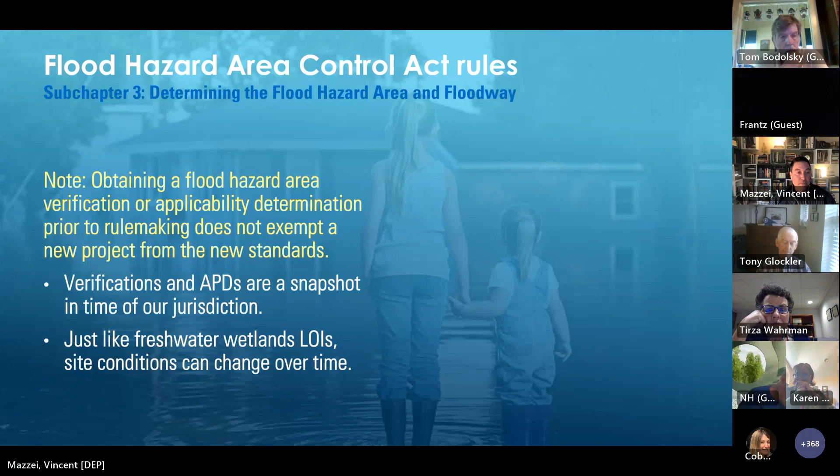Here's that language - I won't bore you with reading it, but this is what it says in the rules related to us issuing verifications and people's reliance on them.

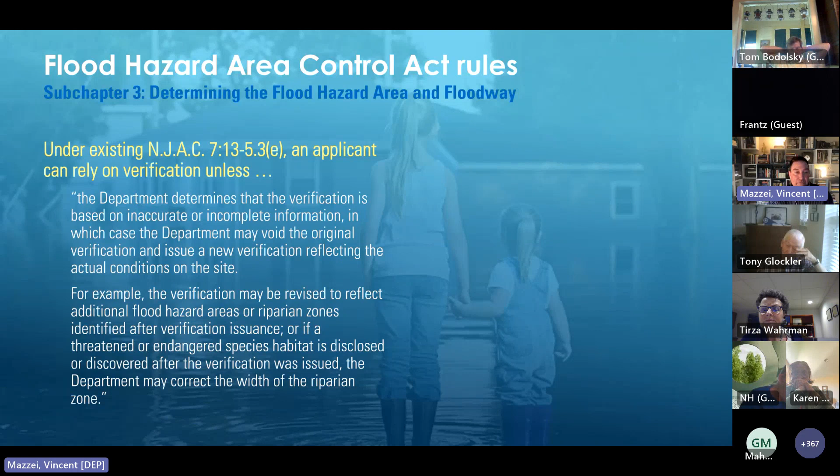There's some examples given in the rule that, like, if we change the flood hazard areas or riparian zones - and that happens under freshwater wetlands LOIs too - we would issue an LOI that had a 50-foot transition area. Then subsequent to the LOI, we found out that there was threatened or endangered species habitat, and now it's a 150-foot transition area. We'll recognize where the development is and can account for things the way they've developed since the verification or LOI was issued, but you don't get off completely from it. We have to have that dialogue and understand what the impacts will be for the project.

This basically just kind of repeats what I said: if you had a verification and you subsequently apply for a permit, the project needs to be revised to reflect the new rules that we adopted last week.

There's a provision in the rules that if you got a verification and then you subsequently got a permit, we reissue the verification along with the permit, because the permitted activities can actually change the floodplain limits on a site. We also want to make sure the validity of the verification runs concurrent with the individual permit. So let's say a year ago you got a verification, and tomorrow you're applying for a permit that you get later this year. We would give you the individual permit or the general permit or whatever it is, and then we would reissue the verification, and the reissued verification would reflect what our decision was on the permit - so it would reflect that added 2 feet.

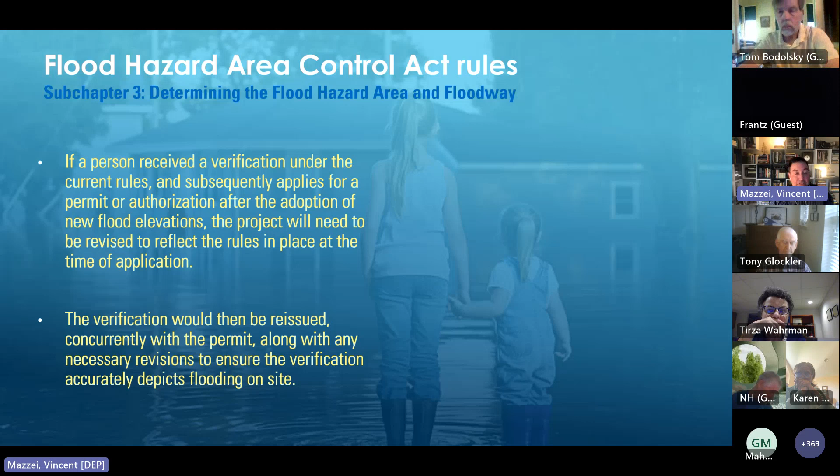We put standards in 2 sections of the rule that deal with our promulgated permits in section 6.7 and our individual permits in section 10.1. It's kind of an umbrella language that says we're not going to issue an approval under the Flood Hazard Area Control Act rules if it doesn't meet federal minimums.

This could affect situations where, let's say, there's a hardship exception. In the vast majority of cases, the pre-existing and certainly today's rules meet or exceed all federal minimums. New Jersey has the most protective statewide floodplain management program in the country. But there were some situations where people could revise maps or get a hardship exception under the flood hazard rules where the result is that the permit might not meet those federal minimums. And there's variances from FEMA too, but the variances under FEMA are different than the flood hazard exceptions, hardship exceptions.

So we're trying to marry those up and make sure that we don't issue a permit for something that doesn't meet the community's National Flood Insurance Program commitments. That's because we want to set people up for success and not failure. We've had situations where we issued a permit and it didn't meet federal minimums, and then the local floodplain administrator and construction official were left trying to decide how to deal with that. They'd say, well, the state flood hazard program said it was okay, I guess it must be okay. But each community has an obligation directly to FEMA to meet those minimum standards. So we want to make sure that we support that.

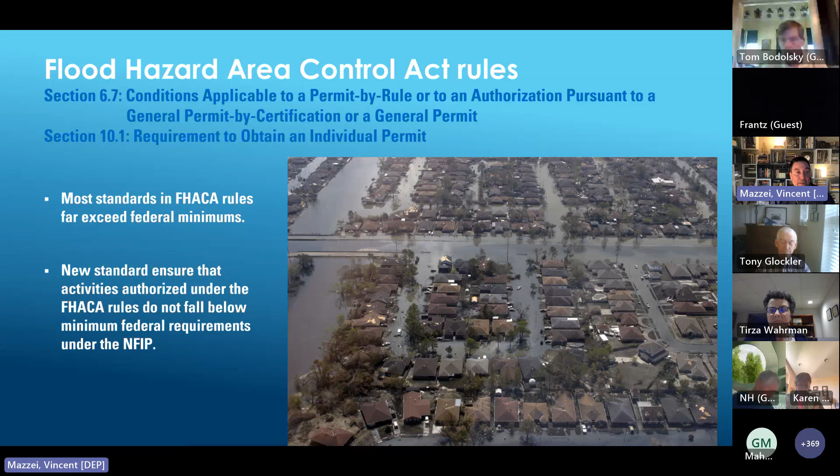Just a few more slides. Section 12.6 in the rule deals with roadways, railroads, and parking areas. There's a lot of text here and I'm not going to read through it all, but basically the starting point for everyone, whether you're a public transportation entity or a private entity, is that the travel surface of that railroad or roadway should be constructed at least 1 foot above this new design flood elevation. So if you're using a FEMA map and it's FEMA plus 3, that means the surface of the road should be at FEMA plus 4 -- 3 plus 1 is 4.

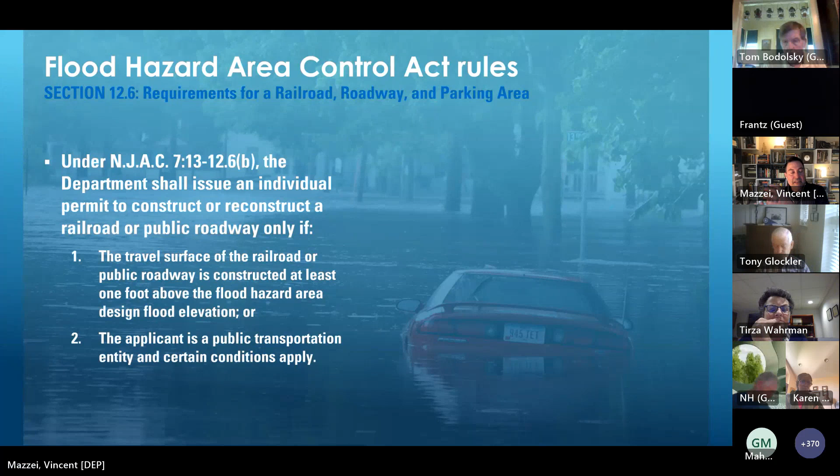Now, if you're a public transportation entity, we recognize that you might be doing a bridge replacement or some work on a public roadway, and there might not be any possible way to elevate it that high because you could be under a few feet of water today. So is there an opportunity to add value and make the roadway safer? Possibly, and that's the kind of conversation we would have during our permitting process. But there's language in the rule that recognizes some of the unique challenges facing public roadways, so if you're a public transportation entity, you have some considerations that the rule provides.

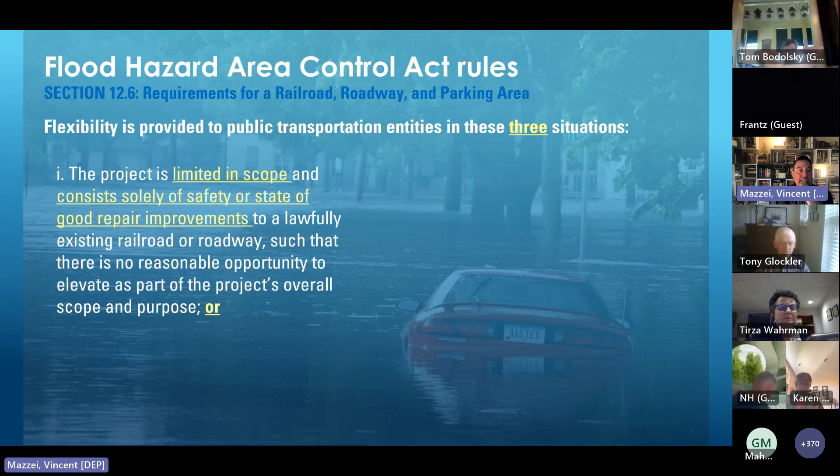So there's flexibility in 3 cases. One is that if the public transportation entity shows us that the project is limited in scope and just consists of safety or state of good repair improvements -- you're milling and repaving, fixing a guide rail, doing intersection improvements -- there's really not an opportunity in those cases most of the time to elevate the road at all. Maybe you could elevate it 6 or 12 inches at an intersection, which we would encourage and discuss during the permitting process, but we recognize you're not going to be able to raise it 5 feet or whatever it might be to meet the new standard.

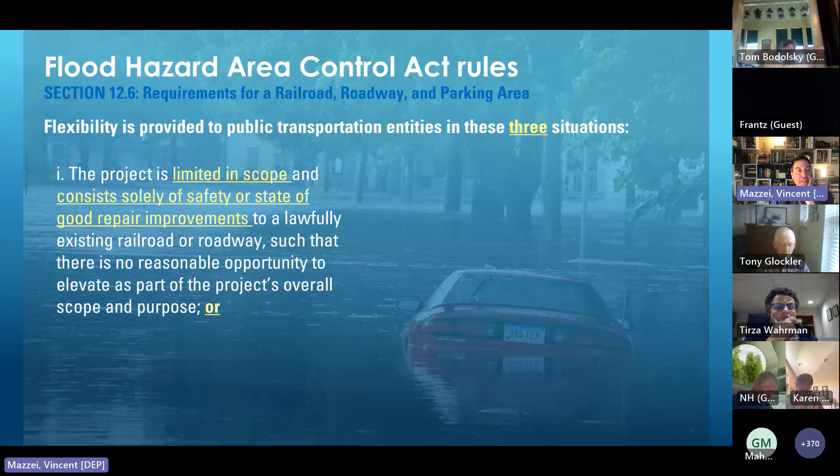Second is the case scenario where it's not limited in scope -- it's a bigger project that we otherwise would look at for elevating. But prior to the rulemaking, the project reached a milestone in the development, like that preferred alternative or equivalent, and redesigning the site to meet the rules would require significant redesign of the project, significant modifications, or additions to private land acquisition. So if going back on a project that's past that milestone means basically a redesign, there's flexibility there. It doesn't mean there's no standard, it just means we recognize that the highest standard can't always be reached.

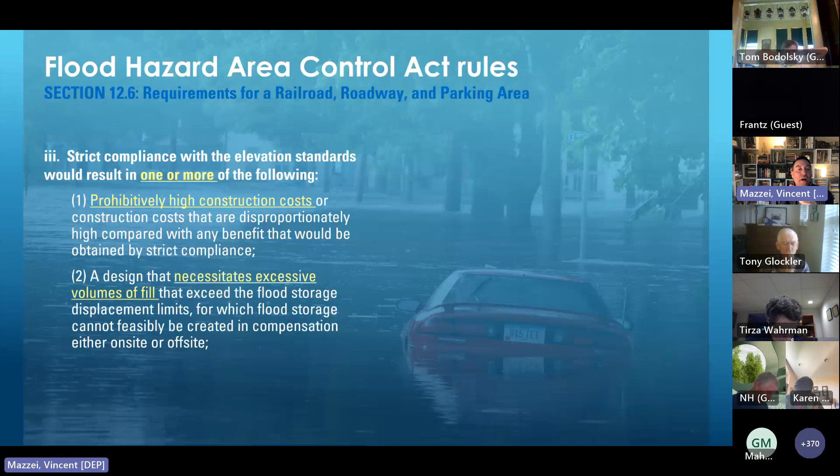The third scenario is even if it hasn't reached that milestone and it's a project that's not just limited in scope, if strict compliance with the elevation standard would result in prohibitively high construction costs, a design that blows away our net fill requirements -- which along public roadways is not necessarily the case because public roadways are exempt from net fill -- or a design, and this one is important to me as an engineer...

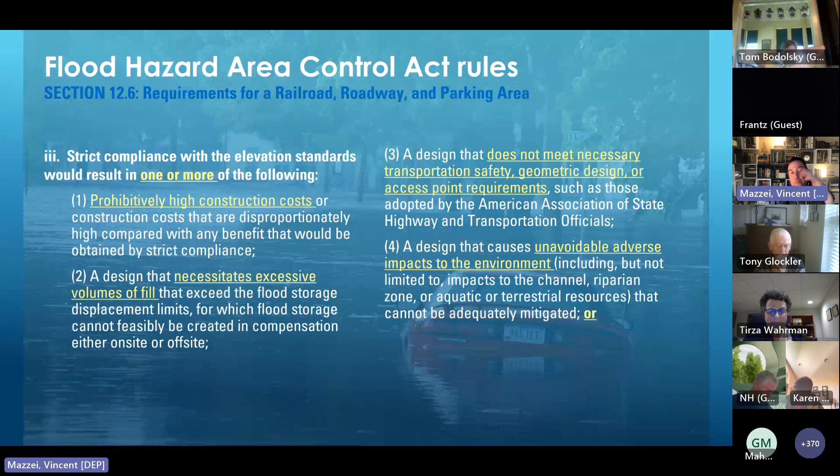I look at this as, well, yeah, we could design it this way, but it's not going to meet AASHTO standards. That's obviously a big problem. Or there are unavoidable environmental impacts that could occur. Sometimes raising the road and changing the dynamics of flooding, or opening up a bridge, could cause flooding or other environmental impacts.

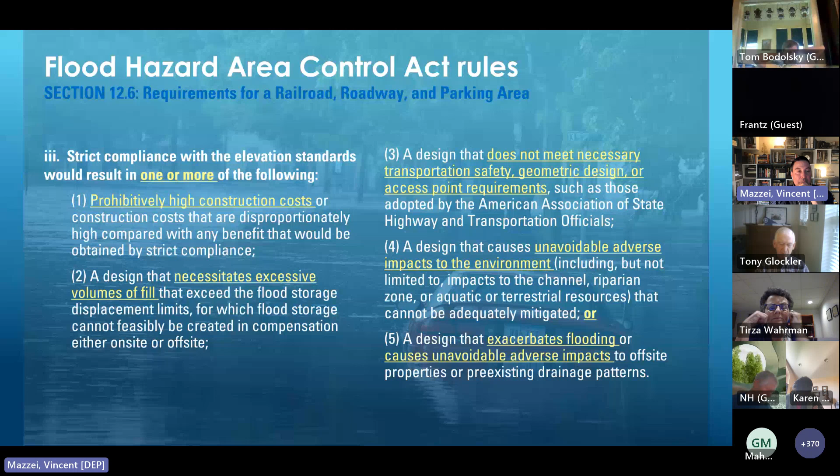So these are the scenarios where we would be able to apply flexibility under this section for public roadways and railroads. Where flexibility is being sought, a licensed professional engineer in New Jersey has to certify and provide supporting documentation that every reasonable effort has been taken to elevate as much of the roadway or railroad as possible, as close as you can to that design flood elevation, given the scope of the project, and that the railroad or roadway is designed to the maximum extent practicable to resist damage, displacement, or loss of service.

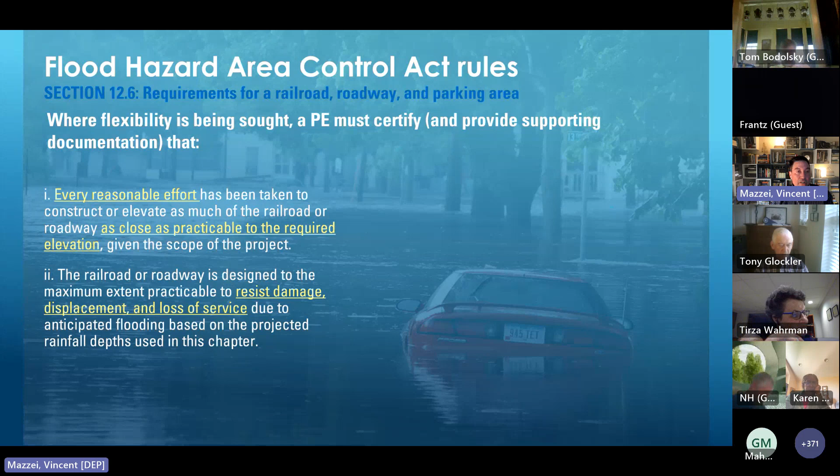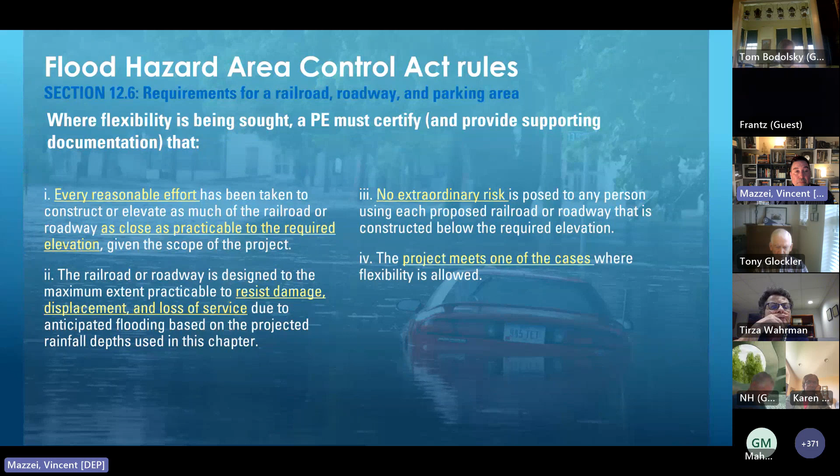So, okay, if the road's going to be overtopped by 3 feet, is the roadway going to be able to withstand that? Is it designed so the structure will still be there, or is the road going to wash out during the flood? No extraordinary risk should be posed to any person using the railroad or roadway, and the project must meet one of the cases where flexibility is allowed, as we discussed.

And in all cases where a public transportation entity is designing a road that is less than 1 foot above the design flood elevation, which is the standard everyone starts out with, they have to put signage in prominent locations along any new, reconstructed, or expanded sections of the roadway or railroad that isn't being elevated to that standard. That way, people have an understanding of the likelihood that an area could be flooded, and that informs how they design, and where they buy or build.

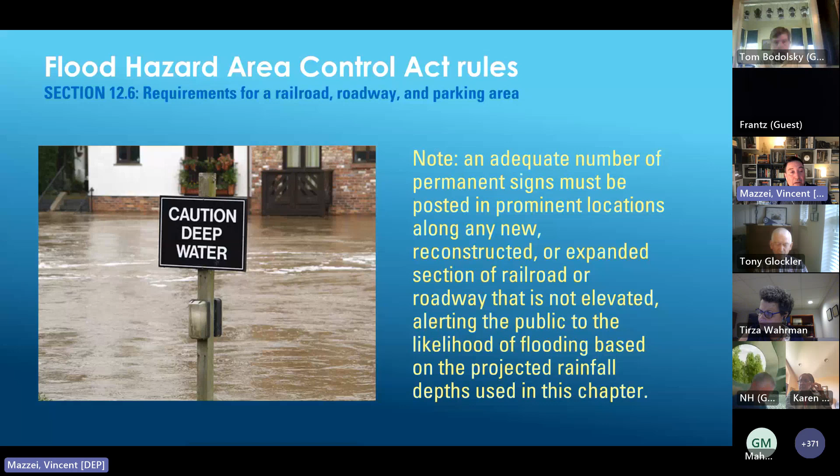Okay, that is my long, detailed presentation, and I will hang out as long as you'd like to answer questions you might have. I can go back to any slides you may have, but I will need a little help from someone because I can't quite see the chat.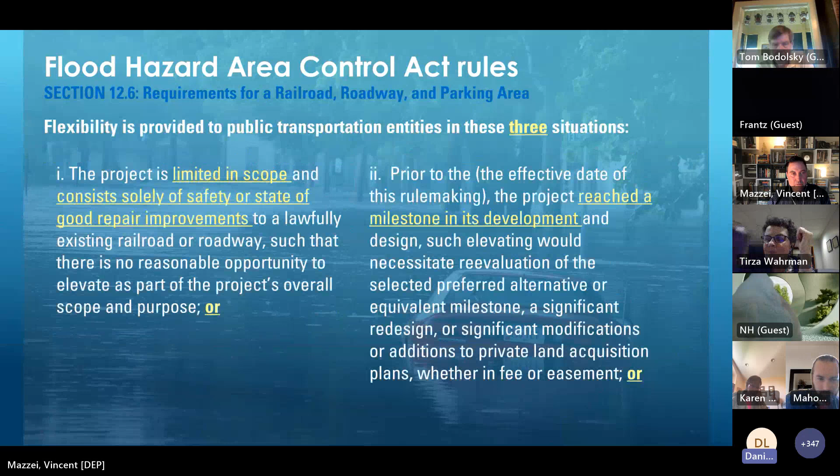Let me jump in here, Vince. So when we're increasing the rainfall amounts, you're also completely redoing both sets of the calculation, the pre-development and the post-development, using the year 2100 rainfall. But because you're using a higher rainfall, the allowable discharge from the site also becomes higher for the 2100 scenario.

So if you look at the 2-year storm for the current precipitation, that's going to be your lowest allowable discharge. Looking at the future projected rainfall, it's going to allow you to discharge more in the 2-year storm. So for today's standards, you're actually allowed to discharge less than you can in the future scenario.

So for the existing condition, you're going to use 2019? You have to actually do the calculations you would have done before these rules came into effect twice: once with the 2100 rainfall and once with the 2019 rainfall. So it's pre-developed 2019 compared to post-developed 2019 for the 2, 10, and 100-year storms, and pre-developed 2100 compared to post-developed 2100 for the 2, 10, and 100-year storms. So it's now 6 storms you're calculating rather than just 3.

Okay, and do you really think there are going to be scenarios where it would work for 2100 and not for 2019? There will be some, and I think particularly it would be the 2-year storm. But you're right, for the most part, if you're going to meet the 2100 standard, it's going to work out. From the scenarios we ran, that usually is the case. Okay, thank you.

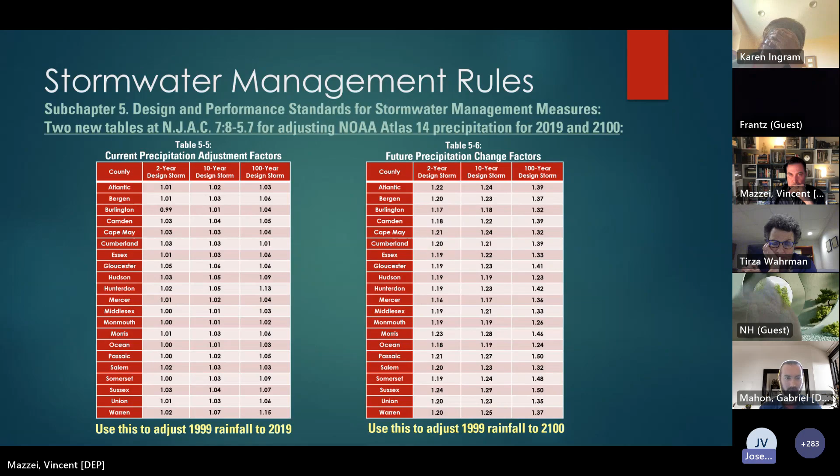That are now in the new system without their engineers being fully recertified by DEP on understanding that. So I was just wondering if you could speak to what might come in the future here in terms of stakeholder outreach, other than this. This is more Society Municipal Engineer focused, so you have the right people in the room. And then when we can all sit for your class, because we'd love to come in and sit for your class next week if we could.

So let me touch on the training first. The current version of the MS4 permit actually includes a new requirement that anytime we change the rules, anyone who was previously trained has to take an amendment training within one year of when we adopt those rules. Recognizing that there are a few thousand people that need to take the training, we are going to have to run several sessions, probably not going to be able to get everyone to attend one.

But we're planning on running the first one in August, so it'll be coming up very soon. Announcements of the date should be coming out in the next week or two, so that'll be happening soon.

As far as the ordinance goes, yeah, we did create that short version of the ordinance because, like you said, other people were already trying to do that. And so we got a lot of requests to create that version that really just references our rules rather than reproducing them. So in that case, every time we change the rules, they don't need to adopt a new ordinance. I do tend to agree with you that when we change the standards, it's hard for them to start enforcing a new standard without having really ever brought that up at a public meeting.

I do question that as well, and I think they should be doing something to alert the public that they're changing their standards. But I'm not sure what they're legally required to do in that regard. I would leave that up to the municipal lawyer to decide what their legal obligation is. But is there a discussion that's going to be forthcoming from DEP on the value of the difference between the short and long version, or is it really just going to be left up to the municipalities at this point to look at their legal position?